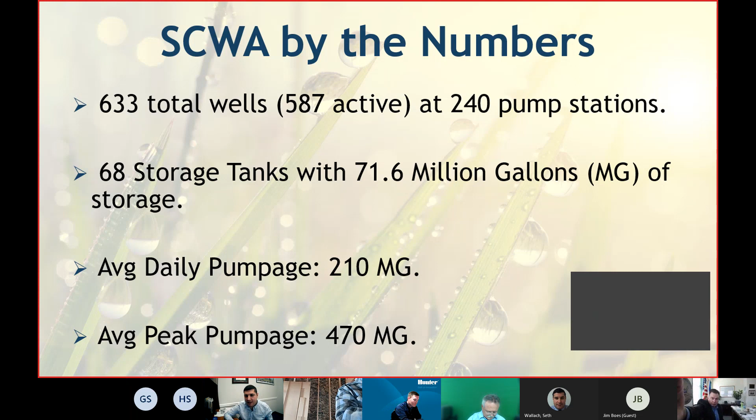Average daily pumpage, we're at 210 million gallons, that's what we average on a given day. In peak season during the summer, that shoots up to 470 million gallons on average. So you can see already just the huge difference between what we call pumping season and non-pumping season.

So who is LICAP, this other organization I'm here representing today? Well, LICAP is a bi-county entity who was formed to address both quantity and quality issues facing Long Island's aquifer on a regional scale.

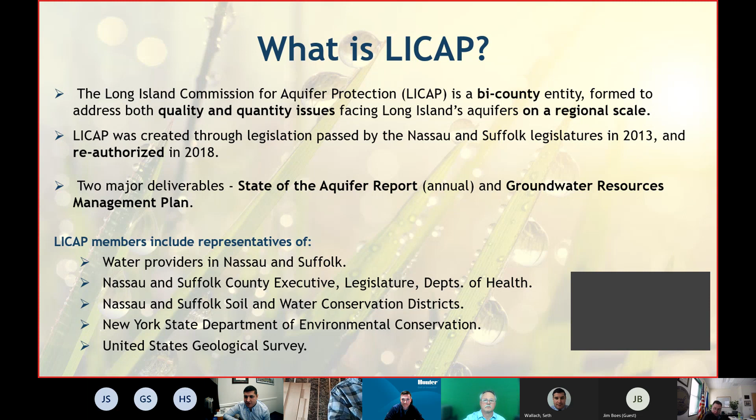So who sits on LICAP? It's every water supplier in Nassau and Suffolk counties, representatives from both county executives, both county legislatures, and both county departments of health, in addition to both soil and water conservation districts, the New York State Department of Environmental Conservation, and the United States Geological Survey. So really, every stakeholder in terms of aquifer management is represented on LICAP, and the whole idea of this commission is to make sure we're bringing everybody to the table and talking solutions on a regional basis.

So why is water conservation important? I understand in some respects I'm preaching to the choir a little bit here, but I'll move through these pretty quickly. The short of it is that Long Island's groundwater supply, while sufficient, we wouldn't run out of water for a couple hundred years even if it stopped raining today. But that doesn't mean the supply is limitless, and that doesn't mean we don't have to use it carefully. So a big one for us is: help us help you.

Higher water usage means the Water Authority has to install more and more infrastructure, which for us costs about $1 million plus to install. And those costs are ultimately passed along to our customers. So the higher our cost to provide water, the higher water bills become. Nobody wants that, so we try to keep those as manageable as possible.

The best way to help us out is actually to spread out your water usage. Most people's sprinkler systems go off between 3 a.m. and 7 a.m., and that could affect water pressure for your morning shower. It could also affect water pressure needed for fire protection and fire hydrants. So it's important that if we can smooth out the peak, even without using less, it's still a great boon to the Water Authority's infrastructure.

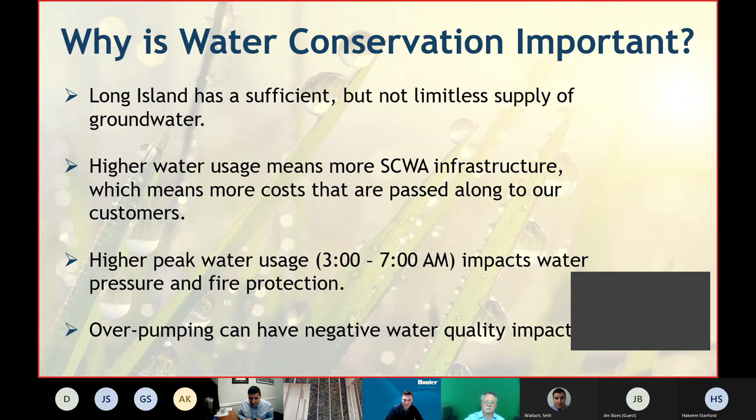As we see here, overpumping can actually have negative water quality impacts. We see this in coastal communities especially, and Long Island has tons of coastal communities. In Long Beach, I know Long Beach Water District over in Nassau actually had some problems with saltwater intrusion, which can foul the well forever. We just want to make sure we're not doing that.

So, residential water use. According to the EPA, more than 9 billion gallons of water a day are used in the United States, and most of that ends up being lawn irrigation. The problem is, as you look at our second bullet, the EPA estimates that as much as 50% of that water is actually getting wasted. It's not watering lawns at all, it's superfluous water. So we want to make sure we're doing everything we can to correct those inefficiencies in irrigation methods. That's what we're here to talk about today, and that's a lot of what Mike and Kevin are going to cover after I'm done.

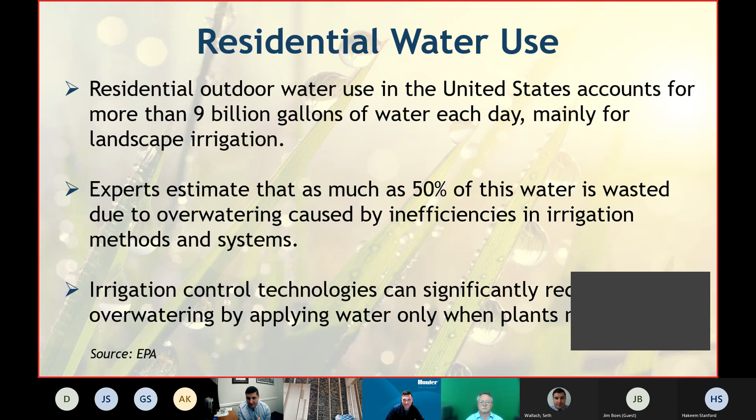Irrigation control technologies are a huge piece of that. One thing the Water Authority has been really pushing is smart controllers. I know the Irrigation Association of New York has been extremely helpful in helping us preach that gospel all over Long Island. Smart controllers really can become a great solution for Long Island.

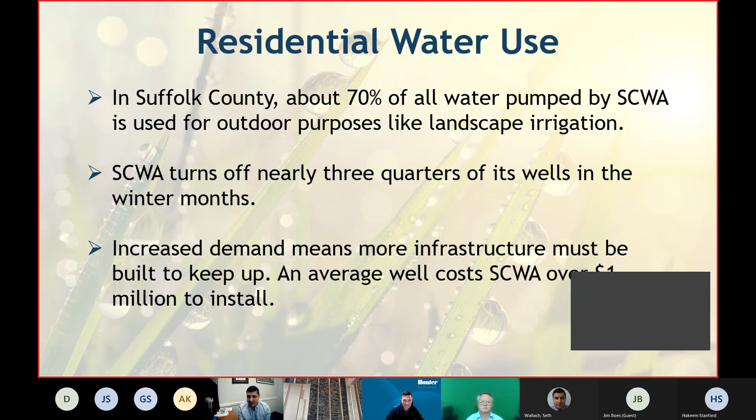So in Suffolk County, about 70% of all the water we pump goes to outdoor uses. And people are surprised to know that nearly 3/4 of our wells in Suffolk are actually turned off during the winter. As I said, increased demand for us leads to more overall costs for our customers.

Just to give you an idea, just to help you visualize, this is pumpage in Suffolk and pumpage in Nassau by season. You can see the light blue line is October through April, and the darker blue line is May through September. Truth be told, we start seeing that uptick even before May, as early as the end of March. So this graph really doesn't even do it justice in terms of the stark differences in pumping. You can see the difference is even more stark in Suffolk than it is in Nassau.

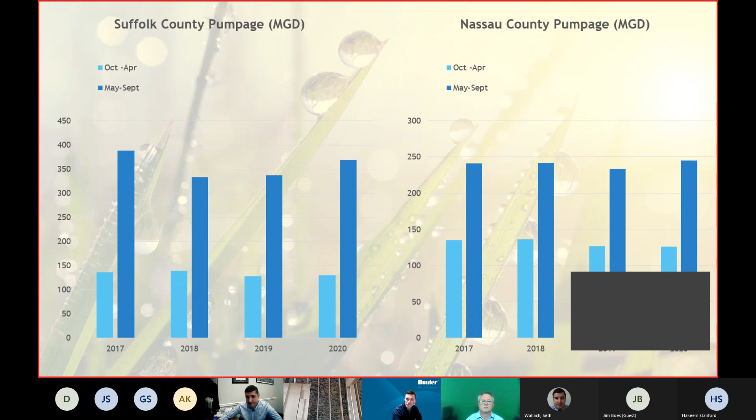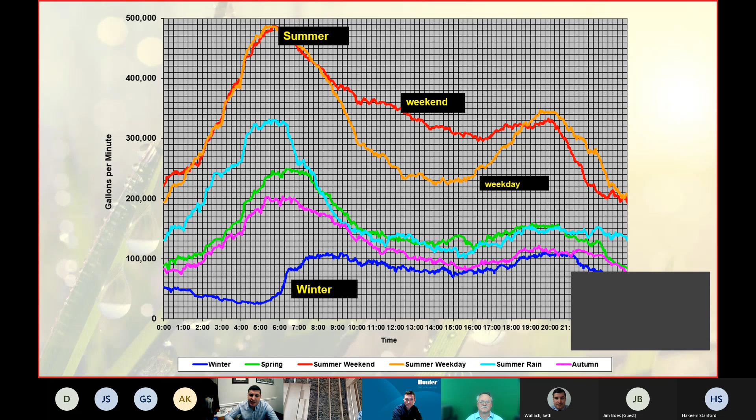So we like to call this graph the irrigation situation. Essentially what you're looking at here, this dark blue line on the bottom is winter pumpage. The x-axis here is time of day with 00 being midnight, and the y-axis is gallons per minute pumped by the Water Authority. The orange line is summer, and the red line is a summer weekend, so even a little bit higher.

You'll notice the light blue line is a summer rainy day. In theory, a rainy day during the summer should look a lot like a typical day in the winter, but you can see how high this light blue line is. That's simply so that people can water their lawns in the rain. It's for no other reason. And so that's the line I really want to point out to you today — that's the problem that we're here to address.

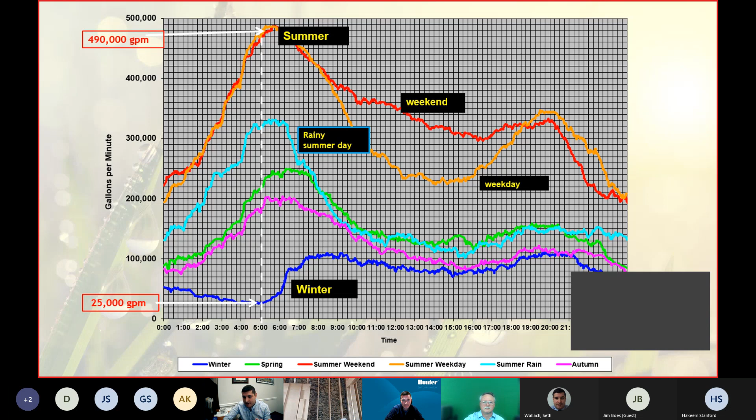So what are we doing from the Water Authority's perspective to combat this? Well, we're asking everybody to spread out the peak, to stop watering during 3 and 7 whenever possible. If you could consider an odd-even watering schedule, even better — that's when odd-numbered houses water on odd days, even-numbered addresses water on even days. As long as nobody is using the water every day, that can really help our infrastructure here. And then probably the best thing you can do, like we said, is invest in that smart controller. It'll ultimately pay for itself over time in water savings alone.

So the average residential user, just so everyone understands, uses just under 130,000 gallons a year.

We did have one customer, because of their geothermal heating and cooling system, and because they were irrigating a huge estate, who used 22 million gallons of water in one year in 2018, which is more than Southampton Hospital, as you can see at 14.5. So these are the things we're looking to get away from.

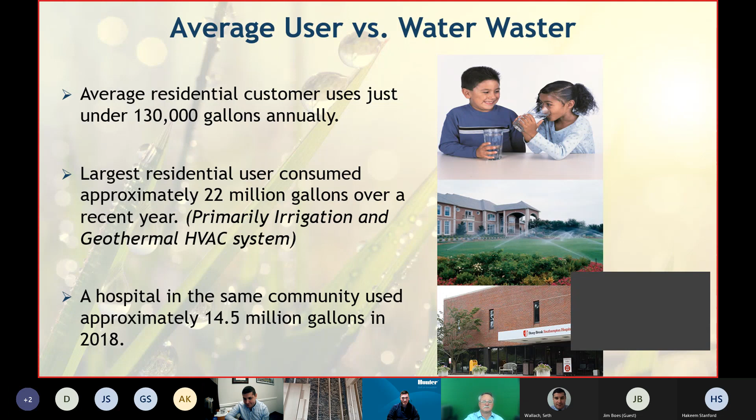Studies show that most smart controllers can save up to 20% of the water applied as opposed to a traditional irrigation controller. This is significant considering 70% of household water use on Long Island is outdoor usage. Not all outdoor usage is irrigation, of course. There's filling pools, outdoor hoses, and things like that. But if we can get 20% savings from irrigation controllers, that could be absolutely huge for this region.

The yearly SCWA bill comes to about $360 a year. So if you're talking about savings from a smart controller, you're talking about maybe $72 a year per customer. Again, that's a huge chunk of an annual bill that could be saved just with this quick switch of a controller.

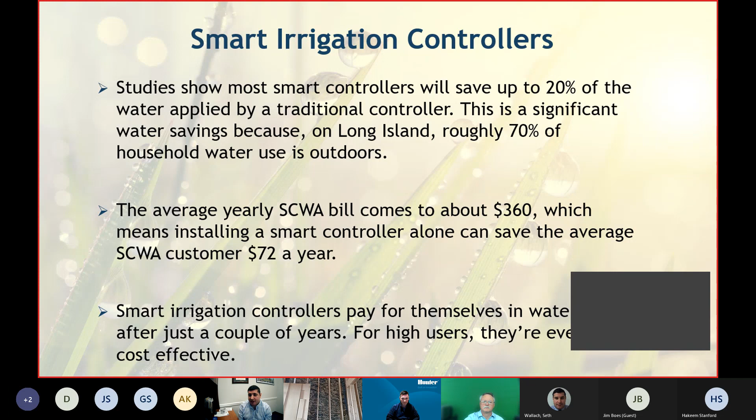And the controller itself doesn't even have to cost money to purchase or install. We'll talk about that a little bit later, how the Water Authority will actually incentivize our customers to invest in smart controllers.

This slide is what we like to call a win-win-win. When customers use smart controllers, they're not only helping to protect our sole source aquifer, they're keeping costs down for us and therefore for themselves, and they're saving money off their water bill. Most smart controllers are easy to control right on your phone, there's an app. Mike can attest to this. It really could not be easier, the technology we're looking at right now.

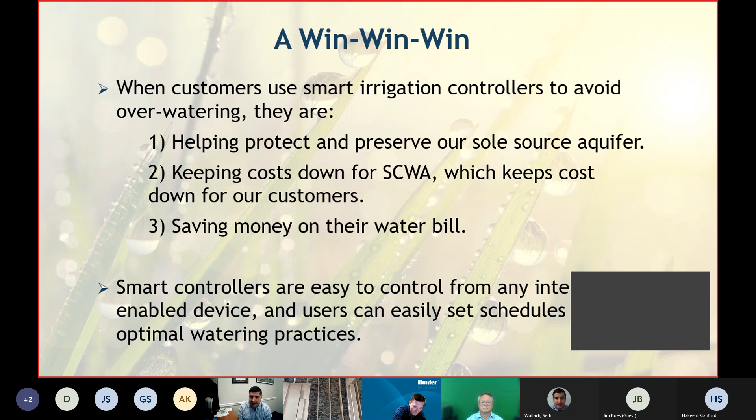So I mentioned earlier how we incentivize our customers to invest in smart controllers. We've got what we call our Waterwise programs, and that gives customers up to $50 off their water bill if they show us proof of purchase of a smart controller or other water saving devices.

Faucet aerators are on here as well. Smart valves are included in this program as well. Low flow shower heads, things of that nature.

And the reason we wanted to make sure— What was that? I'm sorry. Sorry, Seth. Rain sensors also? Yeah, absolutely. Thank you, Mike.

Rain sensors are absolutely eligible for that credit of up to $50. The reason we wanted to let you know this is because if you're doing an install on a customer's home, or if you're taking care of a customer's lawn maintenance and you're in charge of that irrigation controller, this is a program that you can actually tell them about, and you can even apply for the credit on the customer's behalf.

If they don't want to do the paperwork, which is a very quick online form by the way, but even if they want you to fill it out for them, we accept that too. As long as we get that proof of purchase, our online form accepts PDFs, JPEGs, pretty much any file you've got, we'll take as proof.

You could find it at scwa.com/waterwise, that'll take you right to that online form. And if you have questions, you could always email us at waterwisecheckup@scwa.com. We'll also be starting up very soon our Waterwise Checkups program, which actually sends one of our water use experts into the home for a one-on-one consultation that gives customers a customized plan to save water.

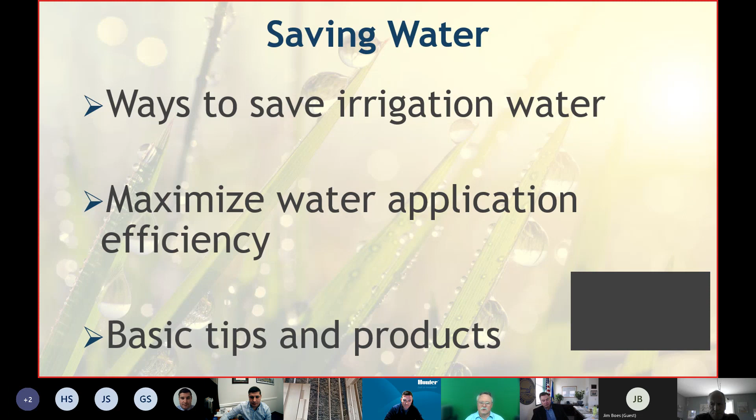We are always watering for the weakest part of a system. So if we do things incorrectly, we're going to have to overwater a lot of areas just to keep that one little spot from being brown, when usually it's the way it was installed that is probably the problem source.

So basic tips and products that we're going to go over, as Seth already pointed out in his slide, rain sensors installed correctly, please—I always call it an umbrella. Anytime you are putting up a rain sensor, take a minute before you install it. Look straight up and look around. Make sure there's no roof overhang over you. Make sure you're not next to the side of a building. Anything that's going to obstruct rainwater from falling on that.

I had one guy install one about 3 feet down from the side of a tall building and told me it was going to get wet there. And I pointed out to him, when it's pouring rain and I've got no place to run, I generally run to the side of a building and I can stand there and let the shower go by, because odds are I'm not going to get wet. Rain always has a little bit of movement to it because of the wind or the direction it's coming from. It very rarely falls straight down.

Also, use the same type of head on the entire zone. We've gotten some new products in there. You can kind of mix and match, but as a general rule, no mist on rotors. They do not water equally, and you're going to flood an area while you're trying to get water out on a large area. We'll get into that as we get further on. Kevin's going to cover some of that.

Stagger zones. What do I mean about stagger zones? Well, when I first started doing this, I always thought it was great. I'd have the system start, come on at the curb, go to the next one just above the sidewalk, go to the middle of the lawn, go to the upper part of the lawn watering back down, and then I would start going around the side of the house until I came to the other side of the house along the other driveway. Problem with this is I'm putting water right back on top of something that I just put water on.

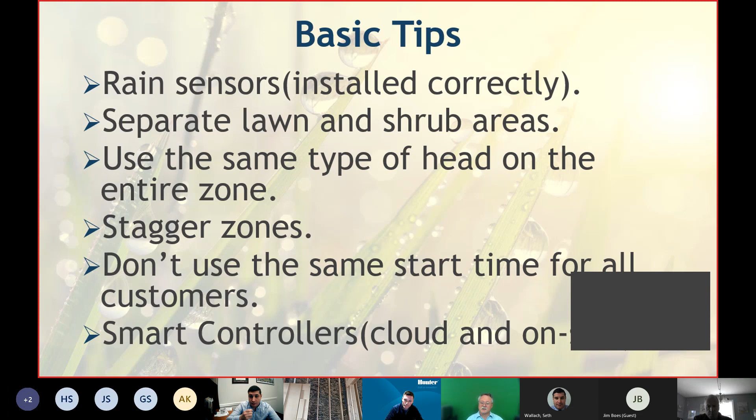You just have to make sure, once again, they're exposed to the sun and exposed to the rain. So you want to put them in a location where they're going to get 6 to 8 hours of uninterrupted sun, and where there's nothing overhanging it, so that the sensor part for the rain will not get in shadow.

Spread out your start times. We've had this argument in the Irrigation Association for quite a long time. If you can't split up existing customers who already have an established time they're used to, as you're putting in new systems, start doing something like this: if the house ends with 0, 1, or 2, start at midnight; if it ends with 3, 4, or 5, start at 1 a.m.; and if it's 6, 7, 8, or 9, start at 2 a.m. Just do something so not everybody comes on at 2 o'clock in the morning and runs till 6, stressing those peak hours for the Water Authority.

If we can move that back and help them maintain their water pressure and water level as we do what's necessary, it will make a lot less impact.

You can even start in the backyard. With smart controllers and multiple programs, maybe run some of the zones in the way backyard or off to the sides of larger properties—areas people aren't going to be crawling or wandering through at 1 or 2 in the morning when they're coming in from being out at night. Remember, a wet customer is never a happy customer.

What I did here is create something because we just had this snow, so I wanted to equate some issues with something we can relate to a little bit. It's a little corny, I apologize, but it's a way I'm hoping to get the point across more easily as we get further into the day.

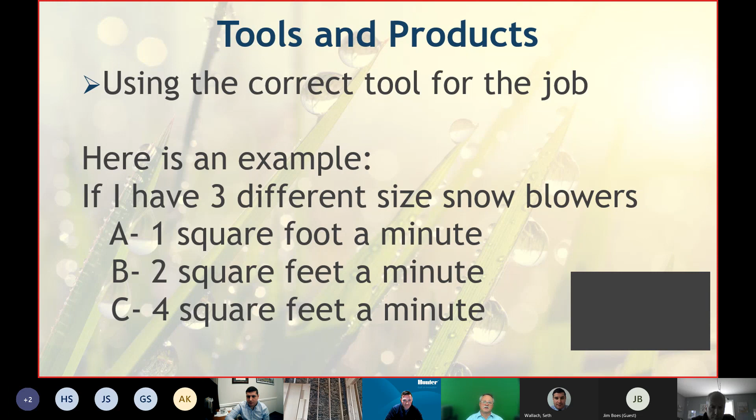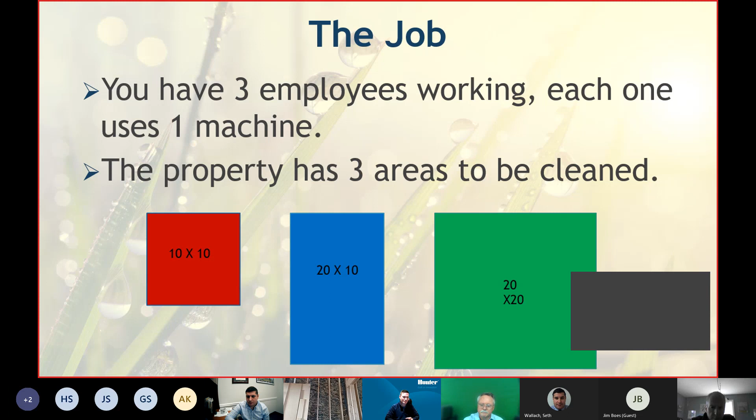Here's an example. I have 3 different snow blowers: A can do 1 square foot a minute, B can do 2 square feet a minute, and C can do 4 square feet a minute. If you have 3 employees pull up to the same property, they're going to be working at the same time—kind of like one zone being run at a time. The property has 3 areas to be cleaned: a 10 by 10, a 20 by 10, and a 20 by 20. Which machine goes where, and how much time does it take?

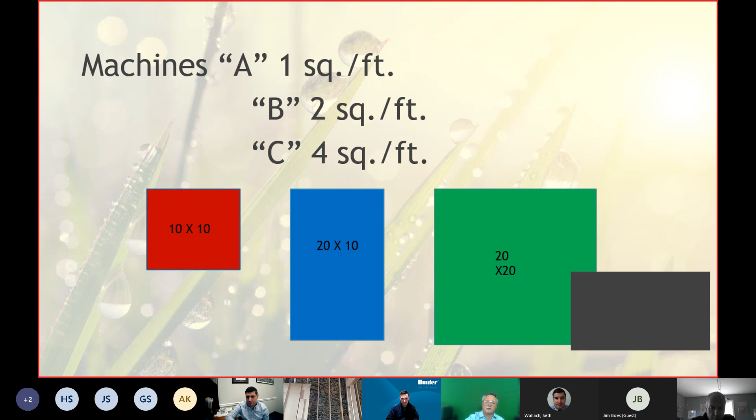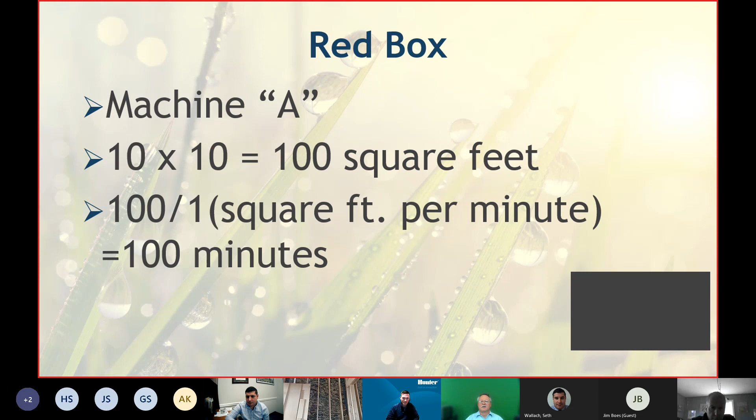The red box should be machine A—that slide was out of order, I apologize. Machine A does the 10 by 10, which is 100 square feet, at 1 square foot a minute. That takes 100 minutes to do.

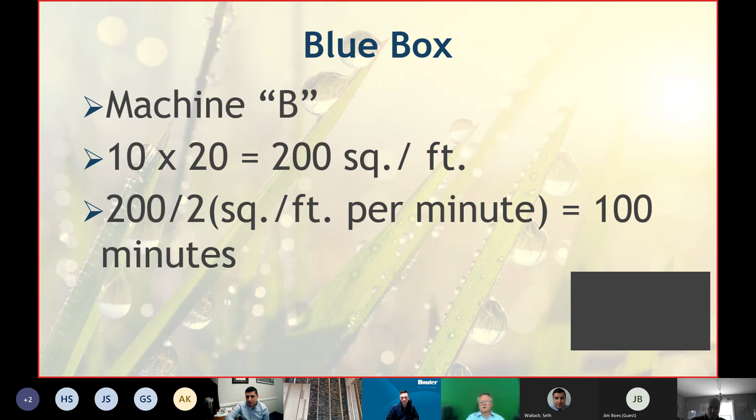The blue box is machine B, doing the 10 by 20, which is 200 square feet. At 2 square feet a minute, that's 100 minutes. The green box is machine C, doing the 20 by 20, which is 400 square feet. 400 divided by 4 is 100 minutes. So all 3 people, all 3 areas, finish at the same time on that property.

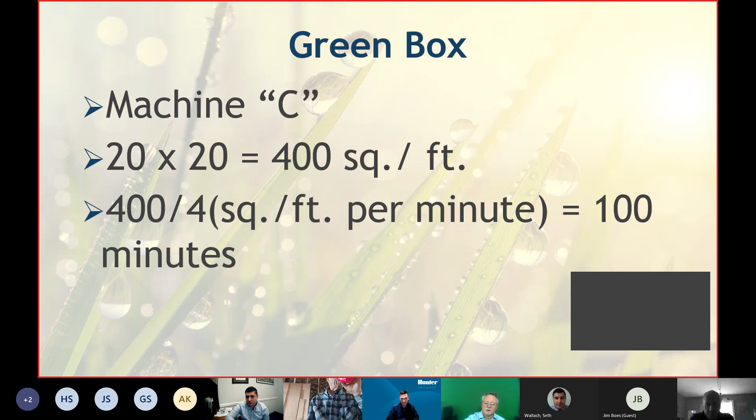So basically everything comes out to 100 minutes. But what happens if we use the wrong machine, or too big a machine? If we use the 2 square foot a minute machine on the small area, it would only take 50 minutes—half the time. And if we use the 4 square foot a minute machine there, it would only take 25 minutes.

We see the same thing with machine B—that should be the 2 square feet a minute machine. I apologize, I messed up on these slides, I thought I'd corrected those. So when you use the right size machine, you're back to 100 minutes, and if we use the 4 square foot machine instead, we're down to 50 minutes. But once again, we're all working on the same location and want to finish at the same time. We'll just go through A there because it's A.

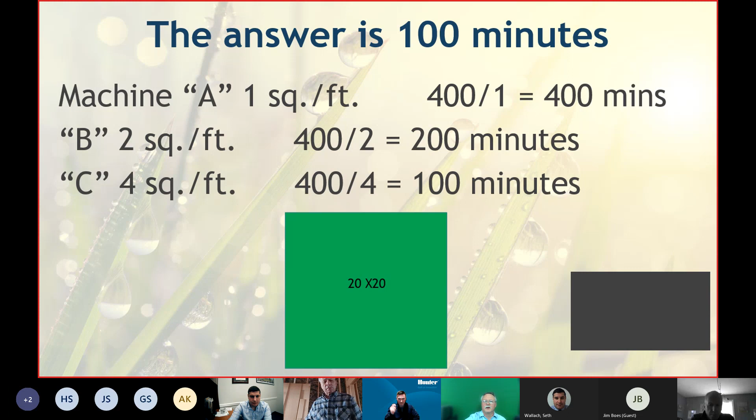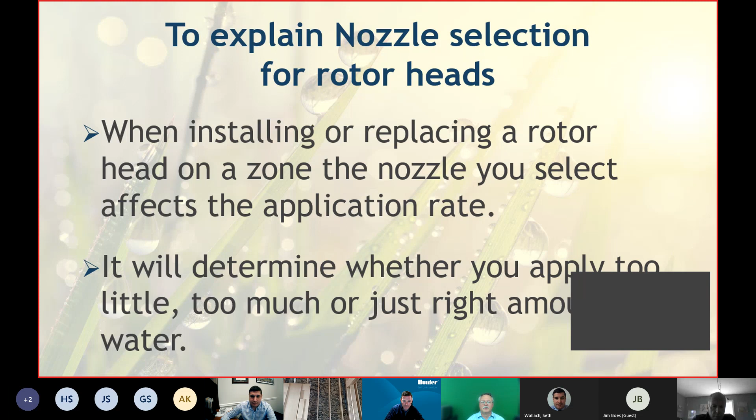So basically, you can see when you use the right one for the right size, you're going to finish at the same time. That's really what we want you to do when you're doing nozzles. That's why we do this, because we're going to explain installing a rotor head nozzle. Most of you guys, which shocks me, buy cases of rotor heads with nozzles already installed. You really should not be using the same size nozzle in a head if it's on the same zone. They should be proportional to what the other heads are. It'll help you determine how to apply the right amount of water.

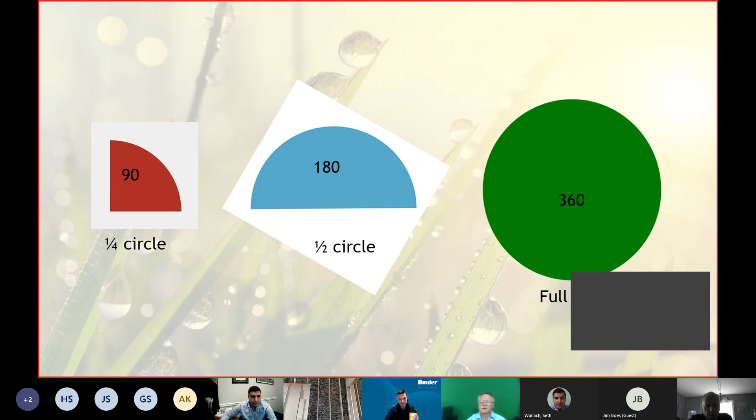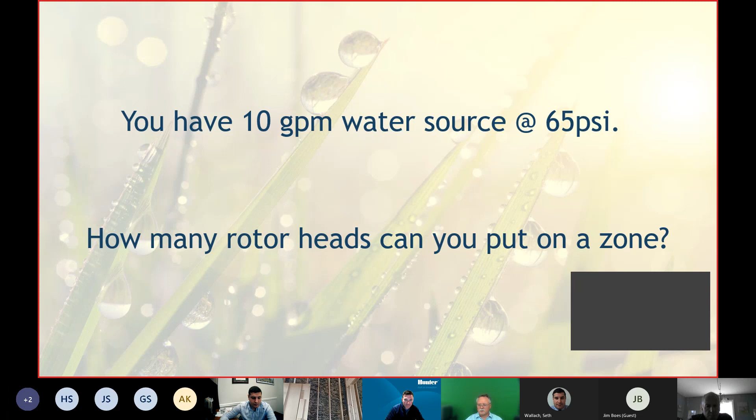So basically that's what I just told you. This is just something that I threw in there. I didn't give you any context, so there are many answers you could do on this, but let's just assume we had some quarters and some halves in here. So if you had a 10 gallon minute water source at 65 PSI, how many rotors can you put on a zone? There are more answers than this depending on the nozzles you use and how many heads and what ratios they are on, but this was just an idea.

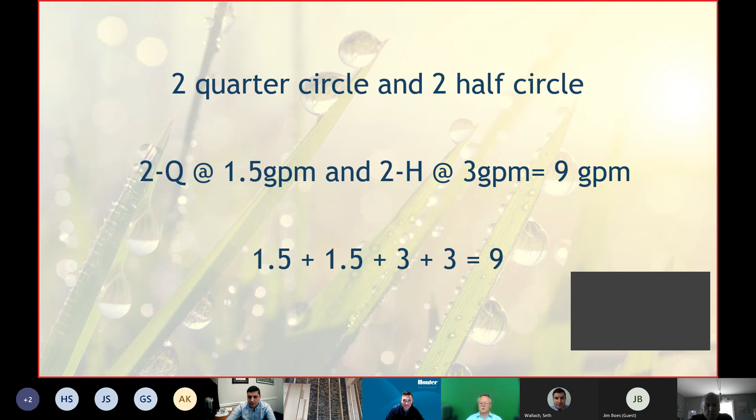So 2 quarters at 1.5 GPM and 2 halves at 3 GPM, because remember, 2 quarters make a 90. So that's what 2 quarters of 90, they make 180. So that's why we have 3 gallons per minute, because it's double. So the whole total there is 9 gallons a minute.

Follow this simple rule and most of your problem jobs will disappear. When I started in this business and we went from pop-up heads, brass heads, and we started going to rotor heads and impact heads, I didn't know this. I had all kinds of problems July and August. I took a class, I found out about nozzling, I followed this simple rule, and 90%, 95% of my self-inflicted wounds disappeared. My life was a lot better.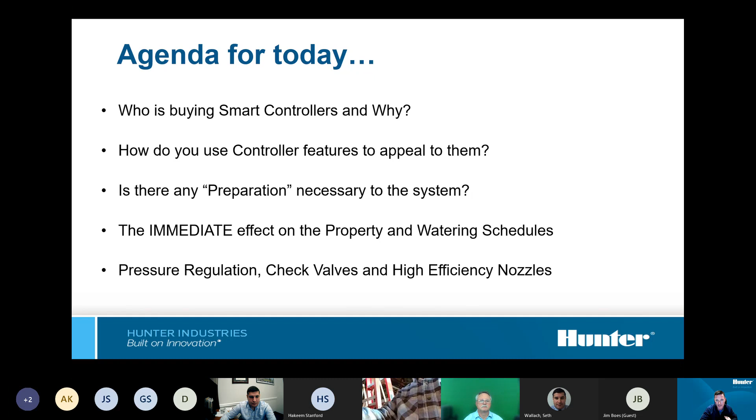We like to point out pressure regulation, check valves, and high efficiency nozzles. So, without further ado, this is kind of how I've positioned it to people from a sales standpoint. Everybody's been beaten up over the last couple of years. Most of us contractors are real busy doing things, installing heads, doing renovations.

So to me, it's about how you're positioning it to them if you're looking to sell it. The nice thing about this, kind of a play off of what Seth mentioned before about these smart controllers being a win-win-win, I look at it in a similar manner. It is a win-win-win situation.

For the homeowner, they get a pretty cool new toy that they get to install in their house and show their friends that they could turn things on and off with a cell phone. They save water, which is cool because it helps them save money at the end.

It also helps the Suffolk County Water Authority and all their neighbors to balance out water usage, to decrease the amount of water being used, to skip irrigations that are going to take place after a rainfall, which is something that Seth also mentioned. But for you guys, you get to sell them a controller, and maybe I do too. So it's a good thing to get in there and do.

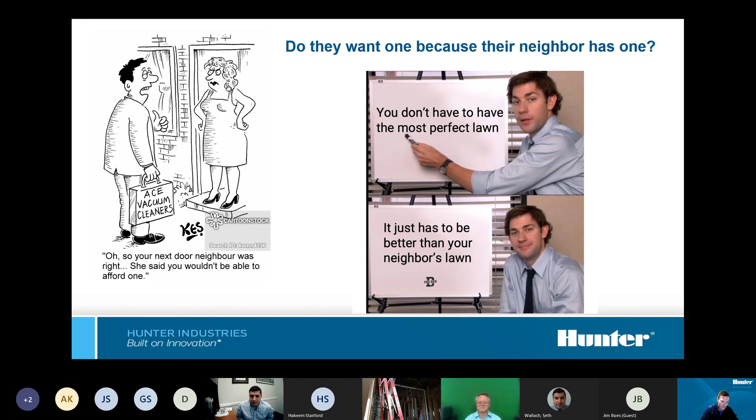At the end of the day, I've been involved in selling connected controllers for more than a decade, and I've done tons of these presentations and proposals, talking about how great the system is, how it adjusts to weather and saves this and does that. At the end of the day, there's a certain element of people that all they really care about is the technology side of it, and we can speak to that as well. We can give them the latest technology. Most of these control systems, since they're online, can get updates pushed down by the manufacturer, so they'll stay as fresh as any brand new controller off the shelves. Between that and integration with home automation systems like Google Home, Alexa, those types of things, we can definitely speak to the technology guy. This is kind of a summary of those things.

You can install Wi-Fi controllers, do system turn-ons and winterizations without entering the house, so you don't have to hand them a bill, you can email them instead.

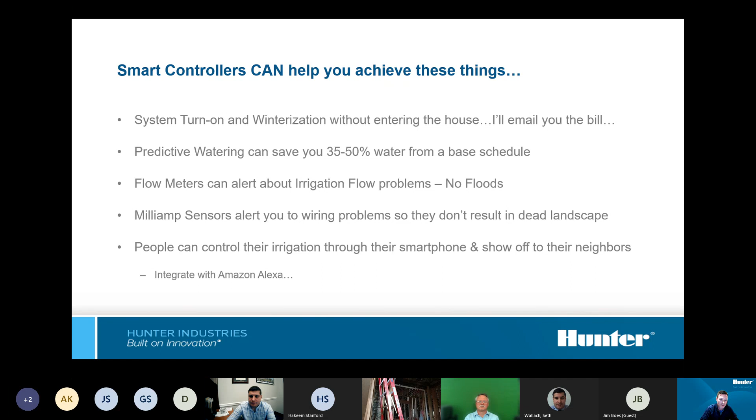So for the person who's fanatical about his landscape, they probably want to know about those settings. People can control their irrigation through their smartphones and show it off to their neighbors. They can integrate it with Amazon Alexa and all those types of things. That's how you speak to the technology person that you're trying to sell to.

But the problem is, if you're forcing the sale, if your only angle is technology - and you may think it's funny that I bring this up, but the reality is I've gotten reports on Long Island that people have called into our factory to complain because a contractor went out and installed a Wi-Fi controller for the person's mother who doesn't have Wi-Fi or a smartphone. So you've got to figure out who we're selling to and make sure it's the right fit.

And then the other side of it, Mike touched on, I'm going to touch on it a little later, pretty much with the same slide. But if you are - which we sell a ton of them here on Long Island and throughout the Northeast - we sell a ton of pre-nozzled heads. They're fantastic. They save you time. It's great.

The issue is that what ends up happening, as Mike outlined, is you have the same nozzle in multiple heads doing different patterns, and what you did with the conventional system is just jack up the run times to make sure you didn't have any dry spots in your lawn. The smarter move would be to go through when you're installing a Wi-Fi controller, check out the nozzles in the heads, and take a couple minutes to go around changing some nozzles up so that your run times are correct for both heads, and you don't end up with bare spots due to the controller reducing watering times because of weather or whatever, and then seeing some imbalanced system getting exposed.

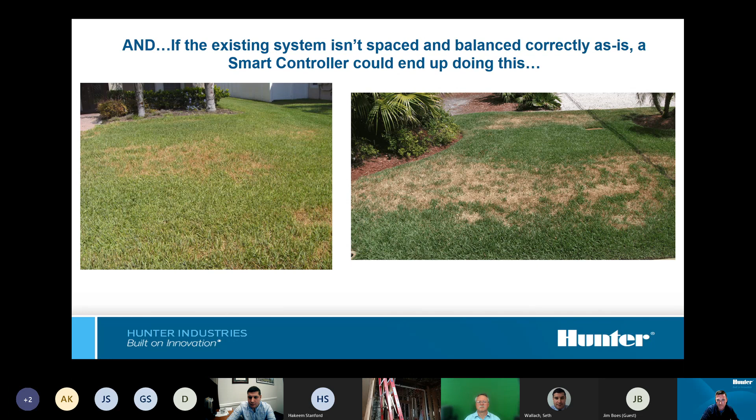And then this is one of the big ones for me, man. We sell a line of Wi-Fi controllers. Fantastic. That's the hardware side of it. Great. The backbone of our system is the app, the control piece. And for me, I think this is a huge deal. You're hanging a Wi-Fi controller and you're moving on. Well, who's controlling this thing?

As the season changes, as weather patterns change throughout the season, as you get into August and thunderstorm season pops up, is anybody looking at the settings within there? Is anybody changing anything? When you spoke to the homeowner to sell it to them, did you discuss this? Who does that fall on? Is that something you control? Is that something they control? With our system, we have global settings that a contractor can go in and change throughout the year, throughout every week if they wanted to. They could push those settings out to all their controllers. This is something that should be discussed - who's going to take care of the settings within the controller?

So upgrading smart control, be aware of your sales presentation. How is this controller going to help? How is it going to appeal to the customer? What is it going to do for them that their existing controller is not already doing?

Know what you're selling. How is each party tied to the controller? What are their responsibilities and expectations? Who's changing programming throughout the year? Who's updating things as weather changes?

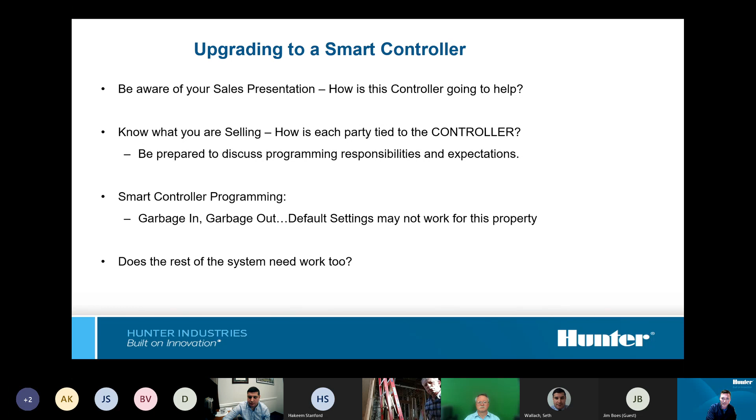Does the rest of the system need work too? We just talked about balancing the nozzles and things like that. Contractors who know it well, sell it well. The guys I talk to who sell it well, I'll go into their accounts and they have 1,000 or 1,500 controllers on their account. They know the system inside and out.

From the contractors who tell me they struggle a little to sell these controllers, they say they're overpriced or whatever the case might be, I usually spin it around and ask them, what's the approach? What are you telling people when you're trying to sell it to them?

Usually it's something very watered down, like, I tell them you can turn it on with their phone and it's got a weather station. That doesn't really, to me, if I'm the consumer, answer my questions. Let's get another layer or two deeper. What else does it do? How does it save water? Where's the weather station? Are you installing it in my house, or what's going on?

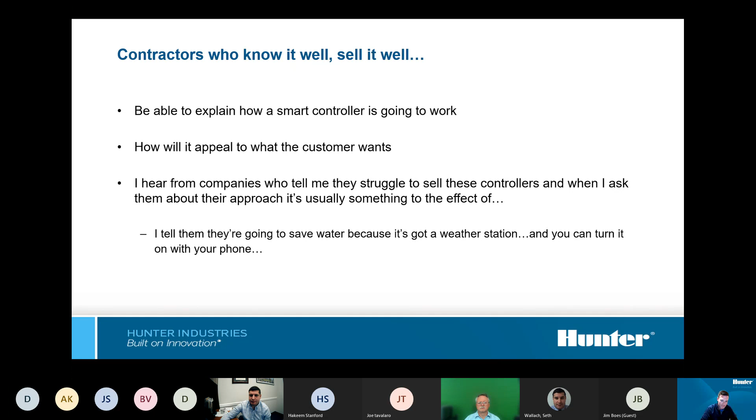So know the system well, know how to position it right, and appeal to your customers.

And tell them the Water Authority will give them $50.

So the next two or three slides may be a little corny, but I like to use these because they break it down to the simplest understanding of smart controls and what they actually do. Some people think a smart controller is a Wi-Fi controller. That's not necessarily true. A Wi-Fi controller is typically a smart controller, but a smart controller doesn't have to be a Wi-Fi controller.

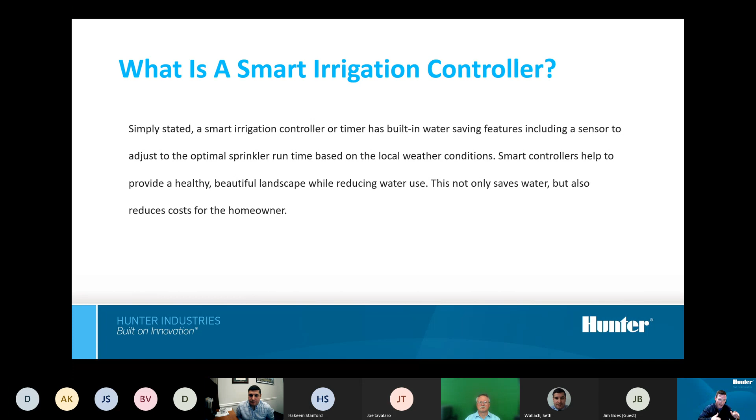A smart controller is basically an irrigation controller that has another device or some outside input taking readings from on-site, or getting readings from off-site, regarding what's happening there, and it's making changes to a base program in the controller. So it's finding out that it's only 65 degrees and therefore taking 30% off your runtime, something like that. It's basically taking a base program, getting some sort of input, and carving down that base program to shave off unnecessary runtime.

So smart controllers don't randomly cut back on watering. What they're really trying to do is match the watering for that landscape with what the landscape is calling for on that day. It's not a random thing. That's why historical ET, which some control systems have, is nice—saying March should use 50% water because it's March, and April should use 60%, and so on. Those are good, but they're not getting you where you need to be.

In the Northeast, we have some crazy weather that's flip-flopping, as you've seen between yesterday and today and last week. It happens throughout the season—we get a cold May, or a rainy spring, whatever the case might be. These smart controllers should be taking inputs from what's going on at the site and adjusting for it on that day. So with that theory in mind, how about trying to explain this to your customers? This is a graph I pulled from something we had on our website.

If you look at this chart, this dark blue inside area would be called your plant's watering requirements. Looking across the bottom axis, we're showing months. So in January your plants require the least amount of water, and sometime between July and August they require the most. So that's what your plants require.

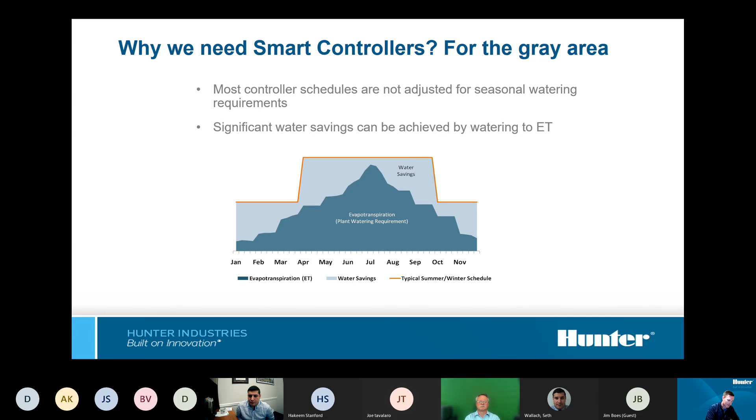They can take into consideration what the temperatures are and reduce the run times down. They can take into consideration rainfall that has fallen and make adjustments to schedules for that, and that's where you start to see your water savings. My feeling is I could sell these controllers if I printed that chart out and showed it to a customer, gave them that example and went through it. Maybe that'll help. But so you sold a controller, now what?

The first thing that typically happens when you start using smart controllers is that your watering times that you're used to are probably going to be reduced, for all those factors I just outlined. So that's something you need to have in mind. We're trained to think one inch of water per week, roughly - that's kind of what we say, inch and a quarter depending on the turf or type of grass people have on their property. But it's kind of a rule of thumb.

You also have to think about what happens earlier in the season, later in the season, when it's a little cooler, maybe on different zones you've got shade, or factoring in rainy or seasonal temperatures. These are all things that are going to impact what your scheduling should represent. So when you set a smart controller correctly, you're going to bring in the current weather data or sensor input, and you're going to try to match your watering times to what your landscape needs for that day.

Mike used this example before when he was talking about a snowblower, talking about matching precipitation rates and addressing the spot and not the time. In our training that's something we talk about a lot. What's the easiest thing to do when you get called - not when you're turning the system on or off for the season, but either you're there to do a checkup, got called for maintenance, or maybe got called because they said we have a burnt spot in our backyard.

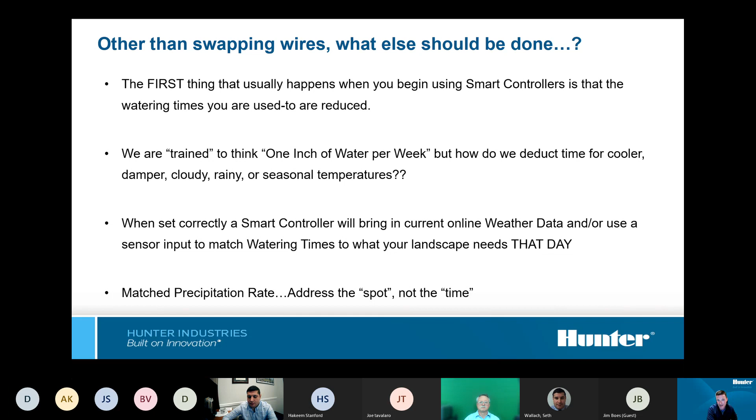So, you know, I imagine everybody's system has something like this. This is just the kind of inner workings of the system that we sell.

The nice thing about our system, I position ours as a contractor controller mainly for this reason. I'm not telling you that every time you go hang a controller for a new customer you have to go in and start creating settings for that individual customer. I know I keep saying it that way because that's really what needs to happen. But you'd like to think that the system you're using would let you make some default settings on your account.

So with our system, the contractor piece of it, contractors can go in and look at their watering adjustments—we call them triggers—and they can customize these so that their account is set up the way they want it.

So with that in mind, you're going to set these adjustment factors to the settings the way you want them so that they apply to your customers' controllers in your region and respond the way that you want. It's doing a few things for you.

It's making you more efficient, first of all. What I mean is, if you have to hang a controller tomorrow for Mr. Lewis, you're not going to Mr. Lewis's house and going through every setting on his account and updating them. That would be very time consuming.

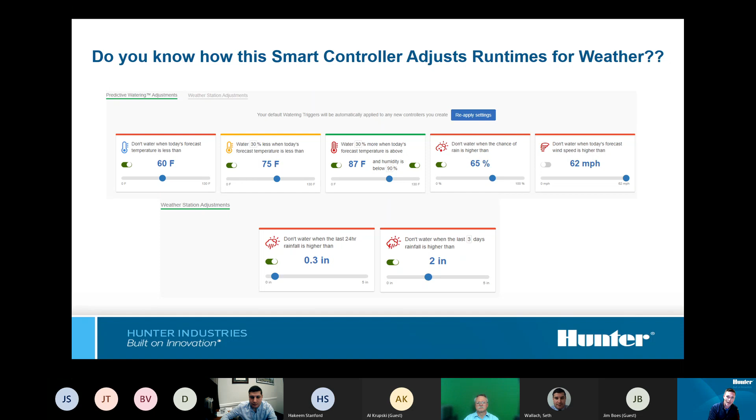And this is what I was talking about before: match precipitation rate and address the spot, not the time. The easiest thing for me to do when I show up and see a brown spot is to jack that time up through the app or the controller. You're not really doing anybody any favors by doing that. It's the quickest means to get off the property, but I understand that at times.

You could take another couple of minutes. We give nozzles out for free for the most part. If you need to change a nozzle or two, it's a really easy swap. It might just take a couple of minutes figuring out what's where and what needs to be replaced. But instead of jacking up the time and wasting more water in plush green areas that don't need it, go ahead and make some changes to the system.

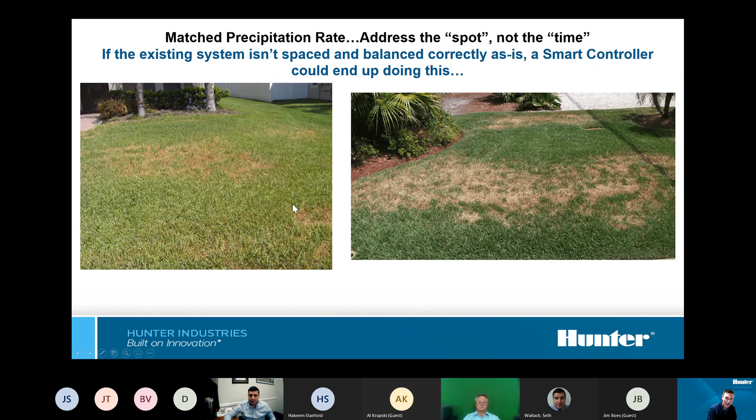Kevin? Yes. Those numbers, where are they located? Can you find them in like the card that comes with the case? Numbers as far as so you can figure out which nozzle to change up and how to do it?

They're everywhere. We put them all over our website. We have them in our catalogs. We include them in cases of heads. If anybody needs them, you can call me, I'll get them to you. I just wanted to let them know where to get the info.

Yeah, great. And so that rule of thumb, an inch of water per week, we do have a lot of rules of thumb for irrigation pertaining to precipitation rates. But sometimes what's installed and the way it's installed, you can't assume those precipitation rates. So this is where you get back into, well, what's in the head? You know what I mean?

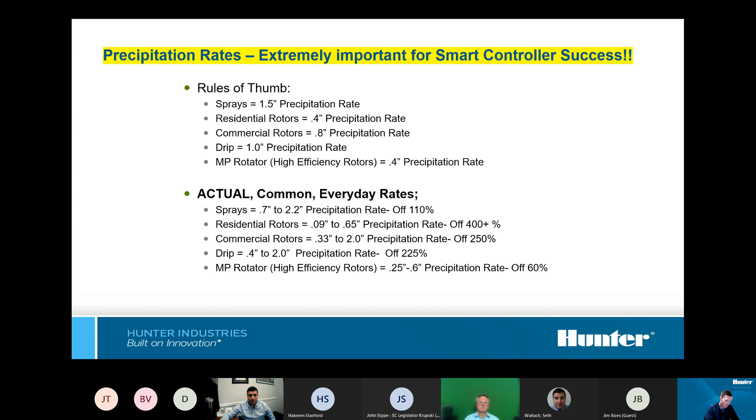We have rules of thumb that you can generally use, especially if you're installing. But when you're working on a system that already exists, you really kind of got to roll up your sleeves and see what's there in order for you to install it correctly, matching precipitation rates. And this is basically Mike's snowblower example, it's the same concept.

Listen, I'm out there talking to contractors. This is somebody else's slide, if I'm going to be honest with everybody, but they put this on here and I thought it was a really good statement: that matching precipitation is probably the most ignored concept. And it gets exposed at times when you're installing smart irrigation systems, because we're reducing that time, and those areas that aren't getting enough water because they weren't nozzled correctly are going to show it.

So Mike covered this pretty well, but if you broke a circle into quarters and gave each one an assignment of a gallon per minute, 4 gallons per minute should be your full circle, and you adjust down. Obviously, that could change based on the supply of the system. If you got an 8 gallon a minute supply, you might not be using a 4 gallon a minute nozzle on a full circle, but the concept still remains the same. Nozzle them correctly. You could still buy pre-nozzled heads. Maybe for every 2 or 3 cases of pre-nozzled heads, you buy a case that doesn't have them.

That's what you use for your full circles and maybe your quarters, or however you want to do it. I understand around here we have a shortened season, we're threatened by the weather, and we have a ton of things that impact our ability to turn a profit, labor being one of them. So time is money, and I understand why we sell so many pre-nozzled heads, but there is a better way to do things.

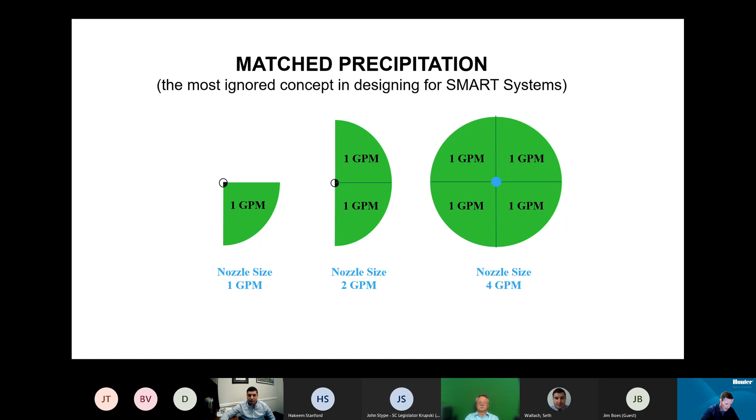So we talked about this also. I mentioned this before when talking about a couple of the different categories of people that we're selling to at this point. So many smart controller systems that you'll buy into can do more than just reach remotely and change programming. I think the biggest concept, as a contractor, that I'd be buying into is the fact that I'd want to know what's going on at a job site when I'm not there. Most contractors on this call have at one point had someone come up to them and ask why every spring when you come, they get hit with a bill to change all these components of their system. And hopefully you're able to explain it to them.

You say, well listen, it's a cycle, an unending cycle, and I'll explain it to you. You call us to come open your irrigation system for the beginning of the season. We have a whole bunch of customers, we come as early as we can, we go through your system, we see components that are broken, a head broken here, a spray head knocked over there, and we fix all these components that needed fixing. We update the programming in the controller, we get you all set and ready for the irrigation season ahead. We leave you with a bill, and then we move on and wait to hear from you again.

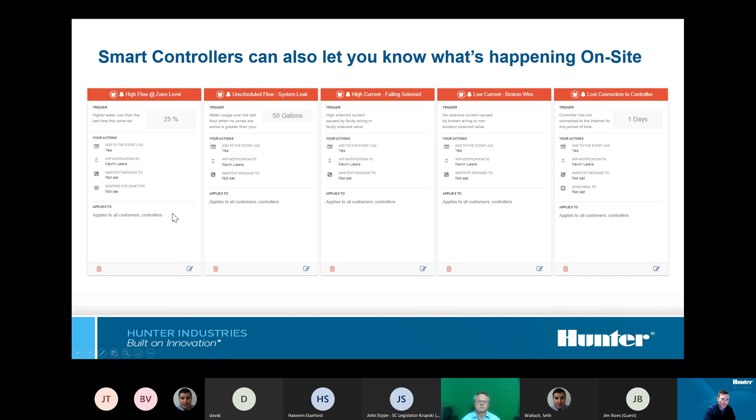So, and that's again - we sell a flow meter on our system. I think some of the other companies do too. Flow meters - a lot of times when I bring them up to contractors, they're like, 'water's so cheap, we don't need it.' You're missing the point.

You're taking a lot of the capabilities out from a really smart system by not having that thing in place. Does that flow meter make it a smart controller? No. The flow meter isn't adjusting run times or anything like that. It will identify a break and pull a zone out of the program. It will notify you if you've got a major break and you could shut your system off. But other than that, the flow meter doesn't have anything to do with making the system smart.

It's just an added feature that, honestly, positioned the right way, people are interested in. And these flow meters are fairly inexpensive - ours are, anyhow. If you're installing a new system, it's pretty easy to actually install.

Installing one on an existing system can be a little bit more difficult. We just launched a wireless flow meter, so that should help out. You don't have to get a wire back to the controller if you don't want to. But if you haven't checked it out, it's probably something you want to offer, and offer it as an option.

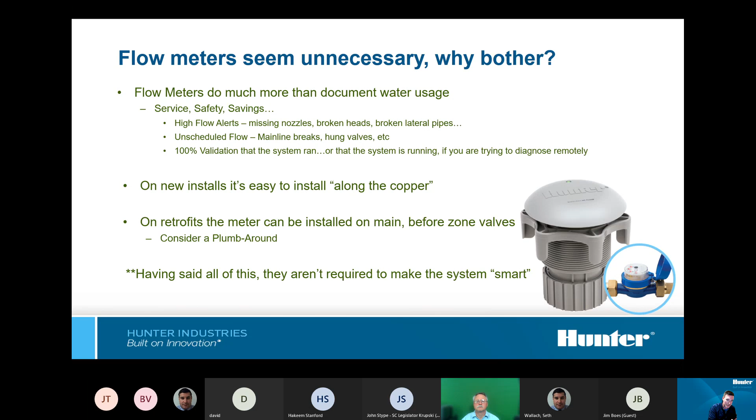I don't know if anybody here works in New York City, but most new projects going up there require flood sensors in basements and flow meters on all different aspects of people's houses. So it's something to be aware of, to know about, and something to offer.

Aside from all of the things that we identified here, what other components do we have that you can offer your customers to make their system much more efficient?

So the big ones for us, and I have LEED credentials myself. If you've ever looked at a LEED project and looked at the irrigation component, what they really want to see is pressure regulation everywhere. They love flow meters, pressure regulation all over the place, check valves, high efficiency stuff, drip, all these types of things. Why do they love it? Because it does a better job of putting down the right amount of water at the right pace.

Pressure regulated components are becoming a mandate in more and more states. For calendar year 2022, it's been mandated in the state of Massachusetts. So in our drive this winter to get everybody to sign their programs, we had to go to all of our distributors and say you have to acknowledge you've signed this - you're not supposed to be selling non-pressure regulated spray heads to contractors anymore for projects installed in Massachusetts. To this point, it's been a West Coast thing, but it's coming around. It'll probably be in Connecticut and New Jersey before New York, but it's coming.

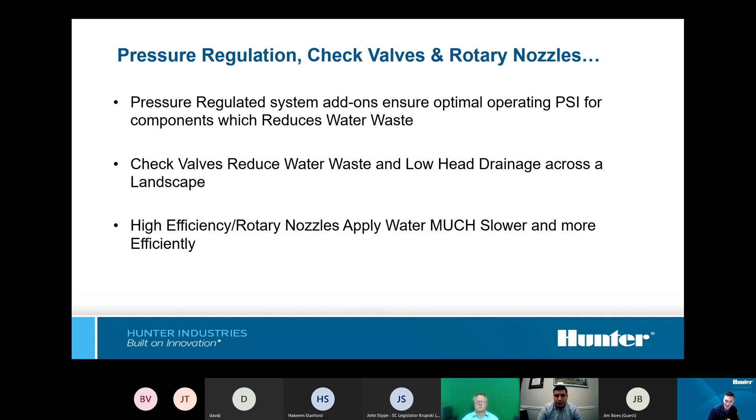So there are little pieces here and there where you can chip away at overwatering. And then the high efficiency or rotary nozzles - I think most manufacturers make them - they're just better. If you see their results on our test stands, they're so much more efficient than spray nozzles or rotary nozzles. They apply water much more slowly. You don't see the runoff you see with some other types of heads. So we're going to go through a few of these.

Pressure regulated rotors, we have them. I think most manufacturers have them. Different manufacturers do them differently. We put ours in the body of the rotor, some people put them in the stem. We sell a 3/4 by 3/4 female by male inline pressure regulator, so you could keep a box of them on the truck and use them where you need to. But bottom line is that these pressure regulated rotors are going to dial into the proper pressure for a rotary head.

So you can have your system running at way higher pressures than you should at the head, and it could kind of leave it running through your valve. You could put less emphasis and focus on balancing out the zone, the way you're laying out your laterals and where you're placing your heads. You could have these pressure regulated rotors just kind of clean up all that work for you. When the water's delivered to that head, the pressure regulator is going to kick in, and we make sure that the water coming out is at the right pressure, thus delivering it more efficiently to where we want to land that water in the landscape.

And hopefully we got a quick, 20-second or so video that might kick in right here.

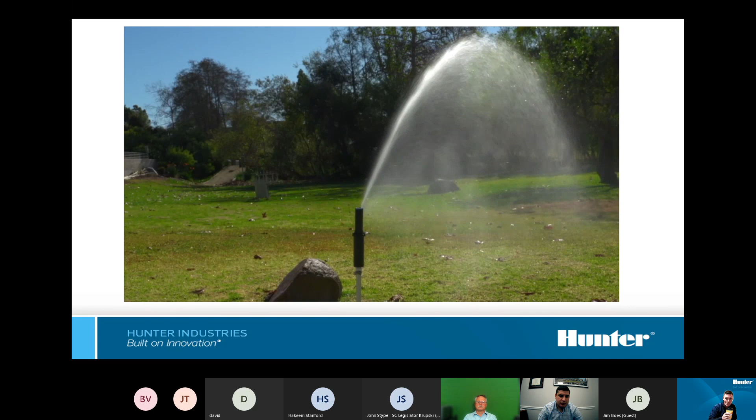Told you it was quick. Yeah, quick and easy video. I think some of us, myself included, kind of initially thought the pressure regulation thing was a bit of a joke. You start to see it in front of you with two different heads running at different pressures, and you got to admit there's a difference.

We're moving on to spray heads, and you'll notice I said spray heads. A lot of us, myself included, grew up in the industry calling these things mist heads, and you hear it slip out from people all the time. Mist head is bad terminology. You don't want this thing to be misting, you want them to be spraying. Misting means the water is being delivered at too high of a pressure. As you saw in that video, especially if you get into any sort of wind, that mist just starts getting carried away. So whether it's a rotary head or a spray head, you want to dial in that pressure to be running at the proper PSI for optimal results for whatever product you're using.

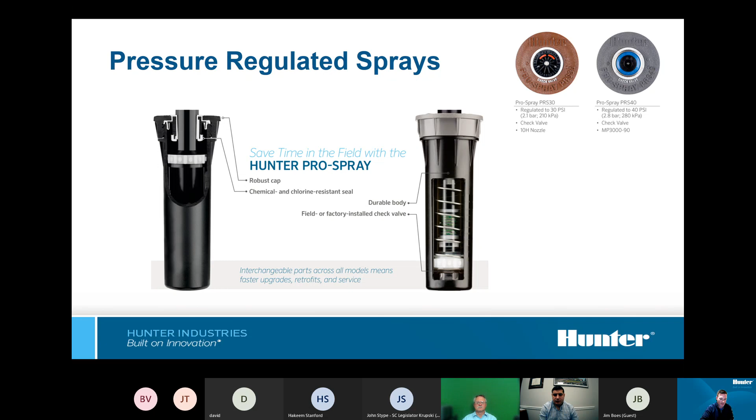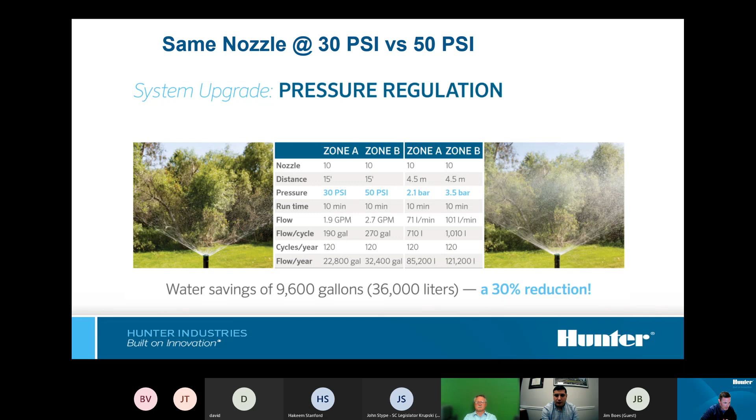So this is one zone of irrigation, just by getting your system to run at the correct pressure, where the heads are supposed to be, where the heads are meeting each other or laid out the way they're supposed to be. Everything's getting exactly what it's designed to get, except you're saving almost 10,000 gallons of water over the course of a year, or about a 30% reduction. Again, this is just by dialing in the pressure to get it where it should be anyhow. You see that big of a reduction.

So that's one example. EPA has given the WaterSense label to us for our pressure regulated heads. They have signed off on our claims of 30% water savings over a non-pressure regulated head on average. So it's something for you to look into. If you're not using them yet, it's just a matter of time until you're going to be forced to use them. There is an increase in price to buy a pressure regulated head.

If you understand the concepts and theories that I just laid out, don't you think you could sell those upgrades to your homeowners if you're able to express that in a good way? I think you are. So it's going to be an upfront cost, but a long-term savings. You also have a longer warranty on those. Oh, there you go, good call.

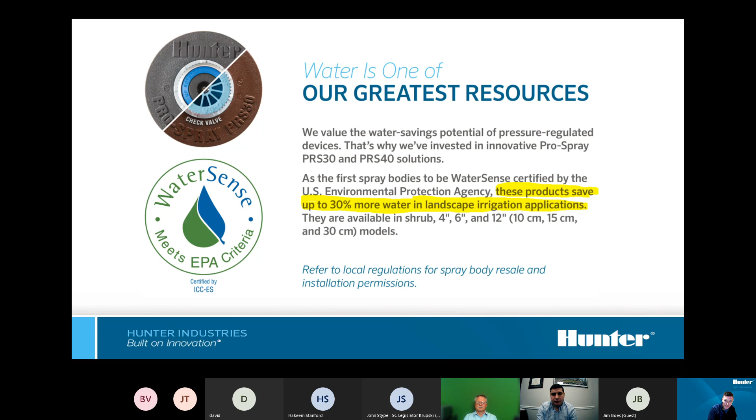And we talked about check valves. Again, this applies to sprays and rotary heads. We sell cases of heads that have check valves in them. Some people buy them and install them in every single head. Not going to hurt you for the most part. Go ahead and do that if you'd like, or you can use them sparingly where you see fit. Wherever you see that slope, wherever that low head is going to be, go ahead and install a check valve in there. Think about it.

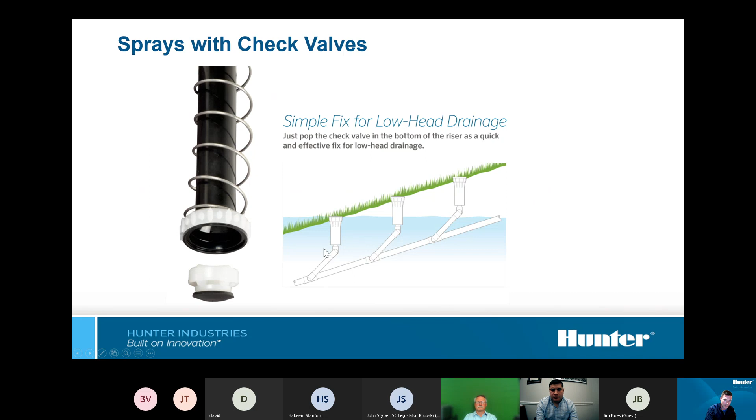You're not saving the water that's sitting in this swing joint here. You're saving all the water that's in this lateral pipe that's ultimately going to run downhill in the piping system to that low head and just drain out. So don't think of it as just saving a little bit of water here, you're saving every bit of water that's in that lateral pipe.

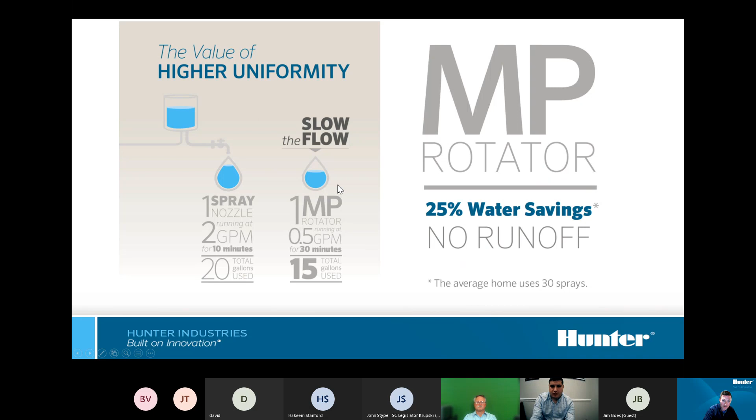If you're really good, you're thinking about using these products ahead of time. The issue we get is most of the time when I speak with people, they're saying, I'd like to make the system more efficient, so I'm going to go back and install rotary nozzles into an existing irrigation system, and we're going to gain efficiencies like that. And that's great, you're going to save water using those nozzles. That's cool, but that's kind of like, what's in it for them. Now you've got to go out and sell a more expensive product, and try to tie it to that water savings they're going to experience, which is fine.

If you're planning ahead and designing with MPs, it changes the whole thing for you. Where you're stuck with certain distances of your spray nozzles, we go down to 4 feet or 6 feet, and go all the way up to whatever we go up to. Our range on MPs goes down to like an 800, I think we'll get down to 6 feet, and then we have 3500s, which go up to, I think we put in our catalog, 30 to 39 feet.

So when installed correctly, those MP rotators, MPR, will match precipitation rates. Installed correctly, with the right product chosen at the right spacing, because you're applying it at a much lower rate, for that reason we can get away with using fewer zones.

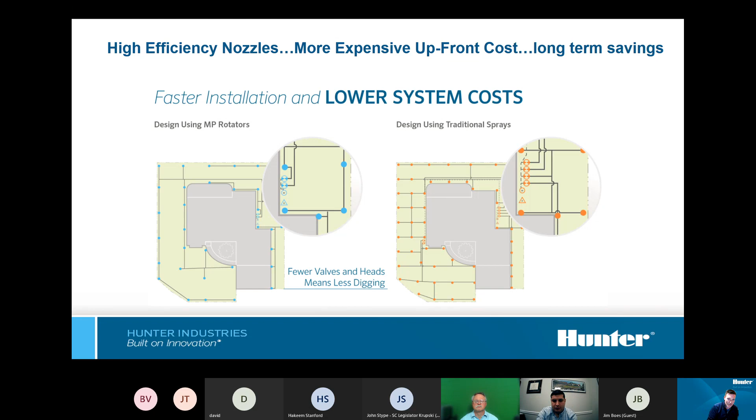Everybody looks at the cost of a rotary nozzle and says, well, I could put in the same head, I could put a different nozzle in for a fraction of the price. You're correct, but you're not seeing the bigger picture. If you're upfront designing with MPs, it changes the whole thing. So that is definitely something to consider.

And here, I think we kind of spell it out for you a little bit differently. Look, this is probably data that's a couple years old, stuff we maybe put out for a West Coast property or whatever, but the theory remains the same. You can design that same spray system using 6 valves with 2. It means you could use fewer spray heads and fewer MPs than you would over here. It means you could use not only fewer valves, but fewer stations on a controller, whether that's modules or whatever it might be.

You could also use less pipe and less wire. So don't just look at the cost of a simple spray nozzle and compare it to a rotary nozzle. Look at the big picture. See if maybe you could change the way you design, so that right out of the gate, you're designing differently and more efficiently. Don't just get scared away by that price tag.

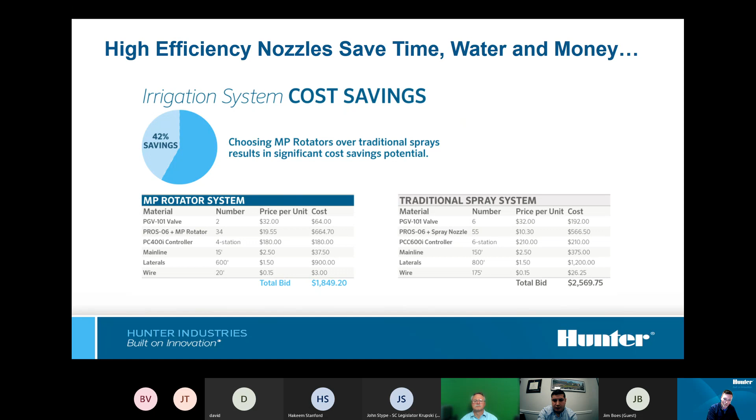And then the last piece I have for you today is, if you didn't want to get down to those details of making sure the pressure is correct at the zone at the head level, whether it's with a rotary or a spray head, we make these. I'm not sure about everybody else, but we make what we call an AccuSync. So if you buy any one of our valves, and you take the solenoid, unthread it from the valve piece, you can thread in an AccuSync in between the solenoid and the valve.

We have these things where they come at certain pressures. You could buy it set to a certain pressure, or buy them where you can customize and set to whatever pressure you want. So it's kind of nice that they're adjustable, and you could tweak those settings depending on how your system's built out. Maybe you have a lot of piping on the lateral side of your zone valve, that adjustable AccuSync might be the way to go. Instead of dealing with every single head out there and paying for that, maybe you keep these on the truck and use them in certain scenarios where your pressure's high or the zone's built out a little funky. So it is an option for you to use at the zone level too.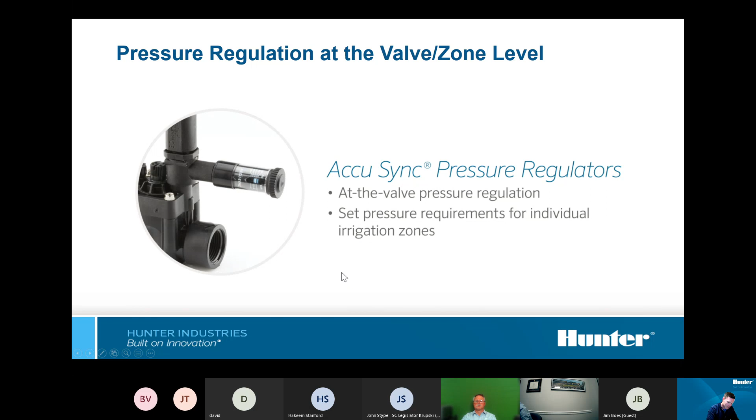I would be happy to meet with anybody to discuss these any further, if anybody wanted to find out more about pressure regulation or more about any of the products that we sold, or talk about digging into the back end of the control system, getting their settings correct, let me know.